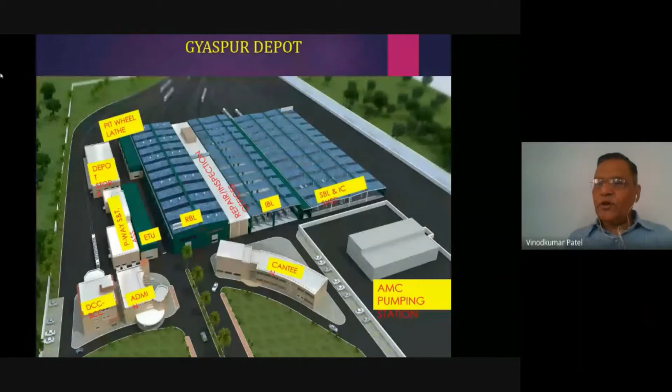Nayan, I will continue. I think this is part of formalities, right? So I want to say something about, yeah. Okay Patanjali, okay also sir. Actually, total number of registration is more than 230. Okay, lovely, continue just sir. No issue because joining is continuing for a long time. Yes, yes, they will keep on joining. Yes, that's good.

So there are many memories connected with Patanjali, especially both as part of alumni as well as personal friend. And yesterday we had a lot of discussion. He has since long been inviting us to visit the locations of Metro Rail, various locations where the work is going on. But because of the pandemic, we could not have a visit there. But let us plan something and see whether we can have a possible visit there.

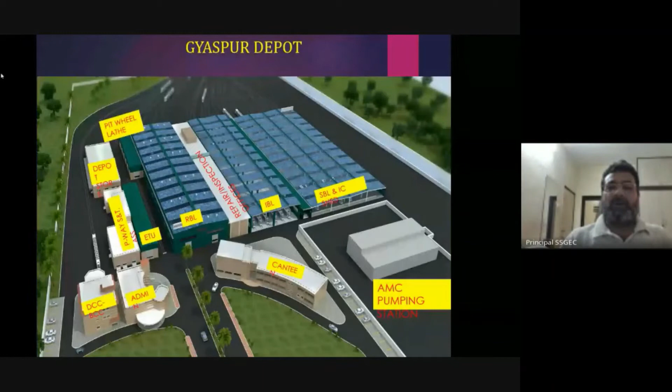And today's his address, I think this is the first one in our restart of this webinar series, right Nayan? Yes. So we welcome him warmly, and we also look forward that just like he has spared his time and sharing his work experience and expertise, this will be an example for other alumni also, that they also will come up and help the students to gain additional extra knowledge, which otherwise is not shared in the classes. But this is what really is very much useful. So not taking much time, I would like Nayan to do the needful and invite Mr. Patanjali for his experience sharing.

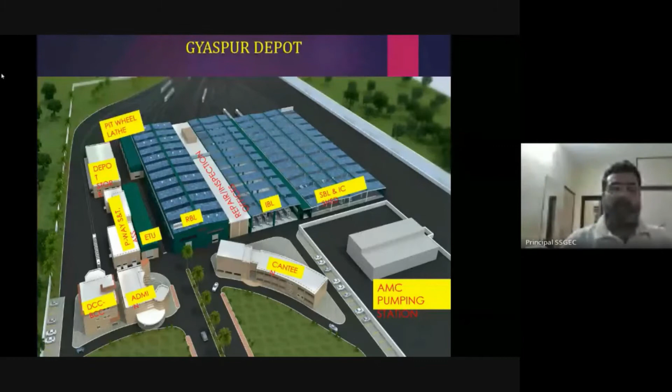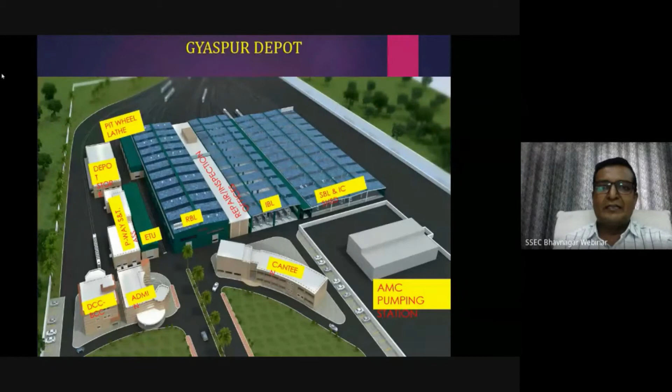Thank you, sir. Thank you very much, sir, for introducing Patanjali sir, and informing our students that sir is one of our alumni, and we are fortunate enough to have his vast experience sharing on this platform of webinar series phase 2. We are very happy that as VM Patel sir told, more than 230 participants registered within a couple of hours, because the flyer was just floated yesterday evening, and by the end of the day we got this much response from our college as well as from Government Engineering College, Bhavnagar, GEC Bhavnagar.

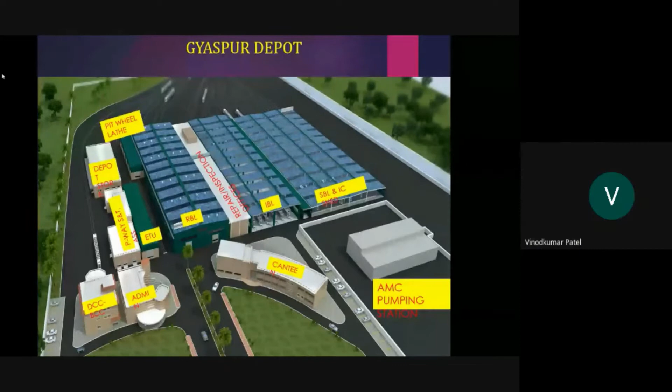Today's topic is also very relevant to the advanced construction of civil engineering. And our today's speaker is none other than our alumni, and my classmate also, my friend and my classmate also. So by the response of the students, we can understand how much it is important. And Mishra sir has a lot of practical experience. Basically, he started his career as an assistant engineer, and now he's a superintending engineer, looking after a very big project so far as Gujarat is concerned, the Metro Rail project. And we will take advantage today, not taking much time. Just I will hand over to Nayan Soni to give a brief introduction, and we will enjoy today's lecture. Soni sir.

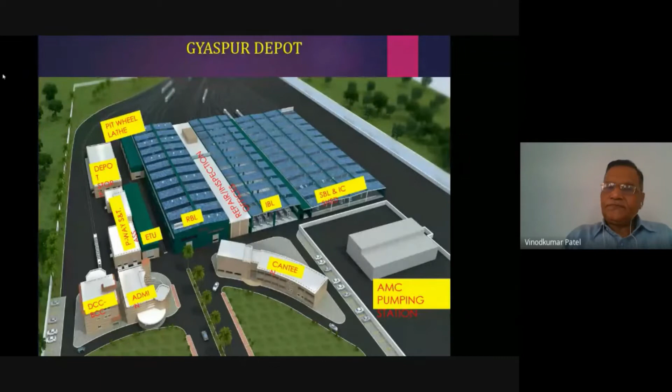Mr. Patanjali J. Mishra, who is one of our alumni from the civil engineering department. Sir has a vast experience of 30 years in the Road and Building Department in the Government of Gujarat, and various department postings in the National Highway Authority of India and the Metro Rail project. So far as the professional experience is concerned, sir is working with GMRCL, Gujarat Metro Rail Corporation Limited, since January 2014 till date. This is the most recent. And he has handled the construction technological work pertaining to metro rail construction during his tenure of 6 years on deputation from the Government of Gujarat. In the National Highway Authority of India, he has held the position of Manager Technical during his tenure of 3 years in NHAI, India, on deputation from April 2010 to December 2013.

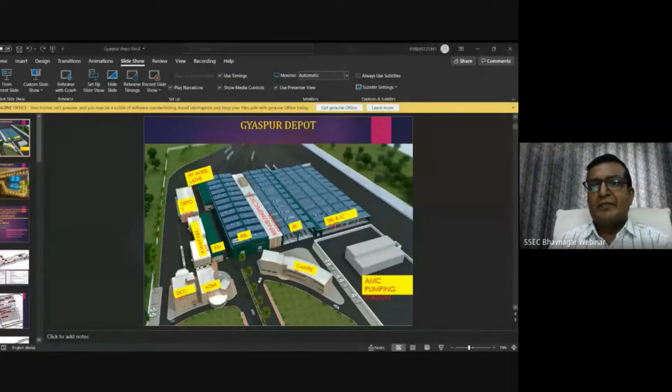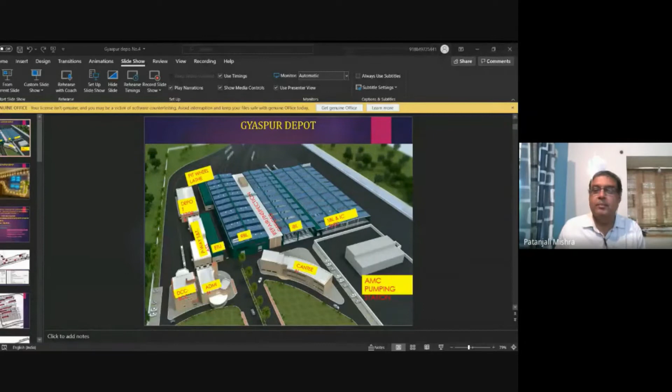In particular reference to my principal sir, Mr. Mangal Bhatt, Soni Sahib was always interactive with me since years, and my classmate, my batchmate, Dr. Professor Vinod Patel Sahib. It is this nostalgic feeling which has brought me for the first time to a presentation format. I'll try to do justice to that. This is because we were always on the site, never had the time to come out with whatever presentation I can bring forth to you. But it was such a great feeling. I think I'm among my own people, in particular reference to my great principal sir, Professor Dr. N.R. Dave.

And guys, to be very honest, I always used to wonder in my engineering years why the first year is common, because we'll study survey, and you won't believe me, my mechanical professors Dr. M.B. Jain, Dr. Dave, they were so great that somehow I used to think I should go to mechanical engineering. That first year is so great that if the professors are good, you start feeling I made a wrong choice in civil, I should have been in mechanical. When you study electronics or electrical, you start feeling I should be there.

But there's only one choice. Metro gave me such a thing where everybody is needed. To start with, if your construction is going on, halfway through, you'll have the mechanical people, electrical people, electronics, signaling and telecommunications coming and saying, I want this done in your civil engineering work, now you are leaving my ducts. So we call these the interface issues. It's not that I can do my civil engineering in isolation and go. No sir, I have to take care of other branches of engineering. So that's one big project where a simplistic knowledge of mechanical, electrical, and electronics engineering is much needed.

It's not that I may be a civil engineer and get away with that. No sir, you have to be there, you have to be sensitive to other people's needs. And it's so mind-boggling, the technology is changing day by day. Suddenly, even at the age of 50 plus, I feel outdated. Now I have to keep learning from my youngsters, young engineers like you who come to my metro rail. I get hold of them and say, teach me this. What is your system? What is your electrical boards? Where are they going? So you have one thing in life: you keep a vibrancy alive in your engineering.

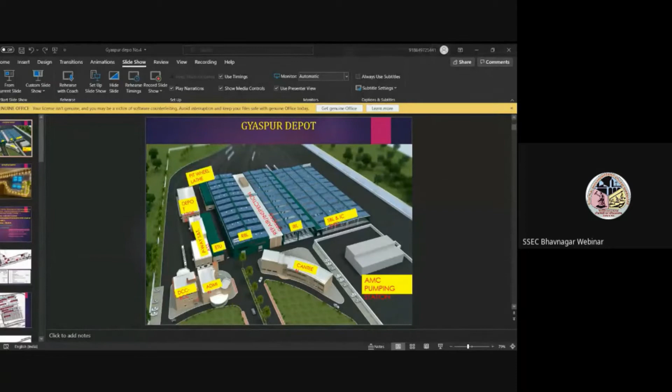Now, this is the aerial view of the metro rail depot, and here, if I may use a pointer, these are the sheds. Now, these are basically the pre-engineered buildings. What is the difference with a pre-engineered building? I can show in the later slides, but I'll mention it here: these are very state-of-the-art, fabricated, pre-engineered structures, which in this depot we brought from the Jindal Steel Works. So the purlins, the columns, the rafters, they come from their workshop and are just erected on site.

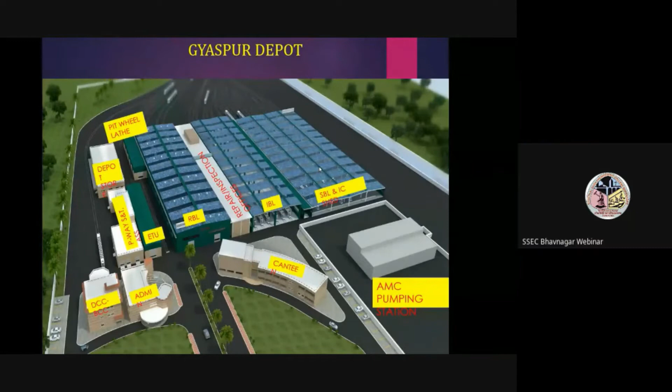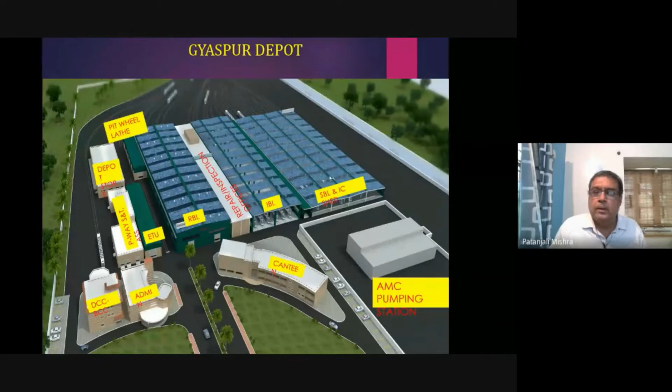So this is basically an SBL, means a stabling line. Stabling line is nothing but like a stable for horses, and for us the horses are my metro cars, metro rail wagons — we don't call them wagons, we call them cars. So these are the stabling lines, these are the internal cleaning bay, you have the inspection bay lines and repair bay lines. The logic is that your day-to-day maintenance happens and the train is just kept overnight, because early morning you'll start the metro and finish off by 10 or 11 o'clock at night.

So they come back to this depot, which is here, the parking garage. If nothing is to be done on those coaches, it is kept in the stabling line. If there is internal cleaning needed, some trash is left behind a little bit, but otherwise the metros are very spick and span.

And we don't even have a human toilet inside the cars. If there is bigger repair needed, we keep them in the inspection bay lines. For a larger repair, say changing of the wheel rims and all that, we bring the coaches out here.

And now this is your takeoff point. Early morning, the trains will leave from here, go up the ramp, and join the elevated structure which you keep seeing in and around the Ahmedabad horizon. So this is basically where your train starts early morning, say 5:36, whatever the time will be.

And by God's grace, we will be commissioning this north-south corridor, which starts from APMC to Motera. We have almost 18 kilometers long stretch in the north-south direction, and the stations are kept approximately 1.1 kilometers apart.

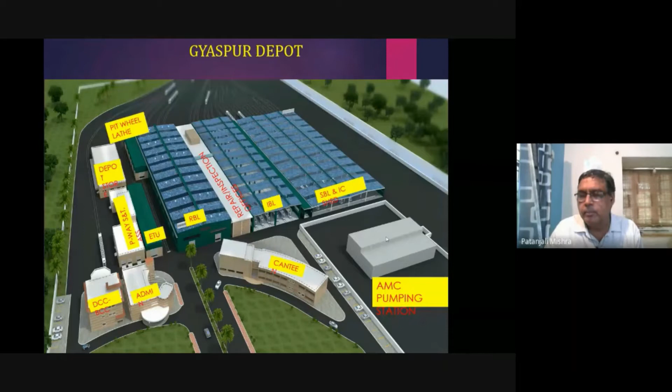And the further station will be Jivraj Park, then you have Shreyas Colony and so forth, then Ranip, then Motera. Motera will be the last station on this route. What we have designed is two routes basically in the metro, north-south and east-west. So for north-south, this is the depot.

And here we have a lovely system called the Depot Control Center. You won't believe it, our metros are driverless. But of course we'll be keeping two drivers, one in the front end and one in the back end. The Depot Control Center is the nerve center of this entire metro operation. The machines, or the cars, are so great you can use them driverless. That's a technological marvel, and you can control everything from this place.

However, we have got another big depot for the east-west line, called the Apparel Park Depot. And if by chance you have an emergency out there, that depot has the master control center which can run both east-west and north-south. And if those systems don't work well on that day, we've got the BCC, that's the backup control center.

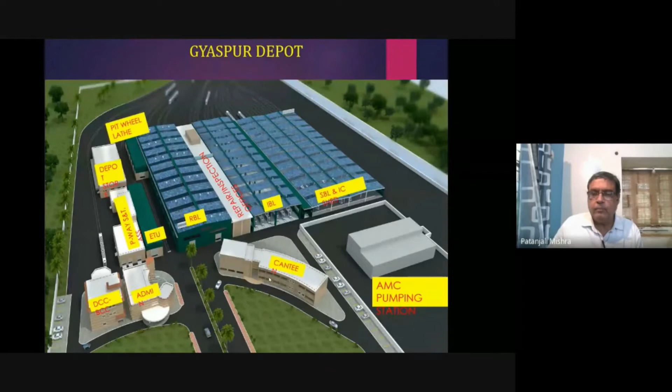Now, this is the lovely overnight view, you can say the bird's eye view. This was the old one, right? And this is your inspection bay. This is your internal cleaning bay. These are the repair sections, these are the workshops, this is the depot center, and you can see the lines fanning out. So we can mention the number of lines out here is around 20.

We've got future provisions also. This is, I think, called the emergency train unit. And now this line which you can see is a test track.

The moment we receive them, the company which is supplying us metro cars is the Hyundai Rotem company from South Korea. And Hyundai, yes, of course we call it Hyundai, but they call it Hyundai, the H is silent. So Hyundai Rotem is the company which is supplying us metro cars.

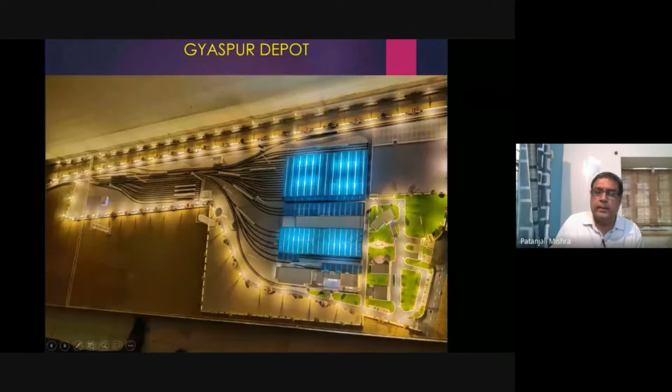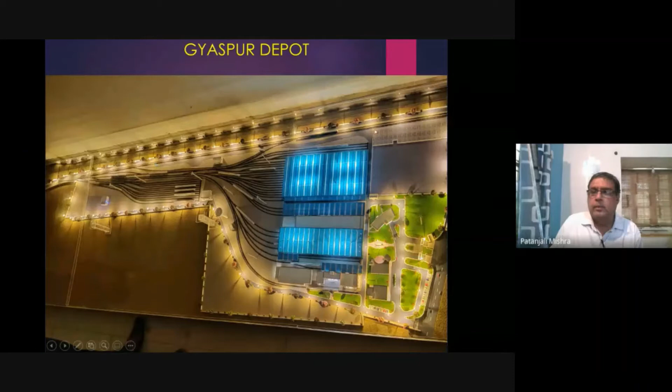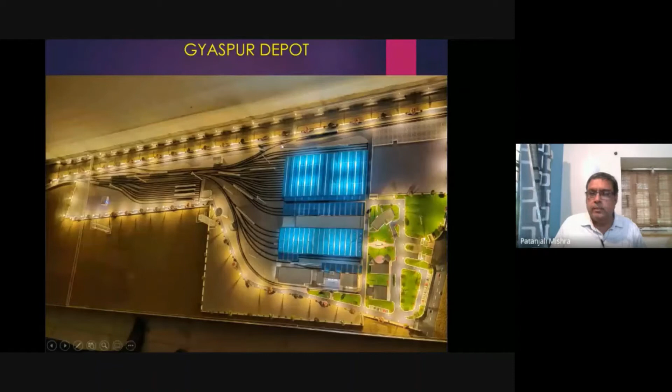This is the test track. Before putting your metro trains or cars into operation and maintenance, you have to test them on a track. So every depot has a test track where you can run the trains which you receive from this train company, and this is called the test track. Sorry, it's 965 meters long. Now you can imagine how much planning has gone into this.

Now this was the project. It was done by Gannon Dunkerley and PS Patel joint venture. The consultants, supervision consultants, we call them general engineering consultants, were basically Systra, RITES, AECOM, OC.

The contract value was 133 crores, but due to delay, cost increase, and the non-supply during pandemic times, workers were not there, so this increased. However, we completed it last year, 30 September 2020. Now these are the maintenance basic lines, stabling yards.

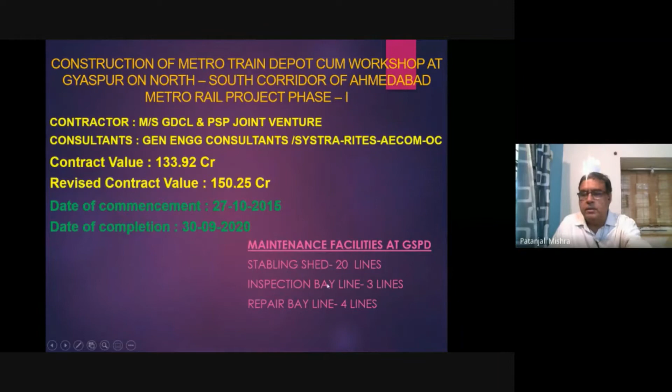We got 20 lines, inspection bay lines, and we have 3 lines. Now, if I enlarge this, you can see this is the basic structure, and this is where the tracks come out of APMC. You will have that Vishala Junction crossing.

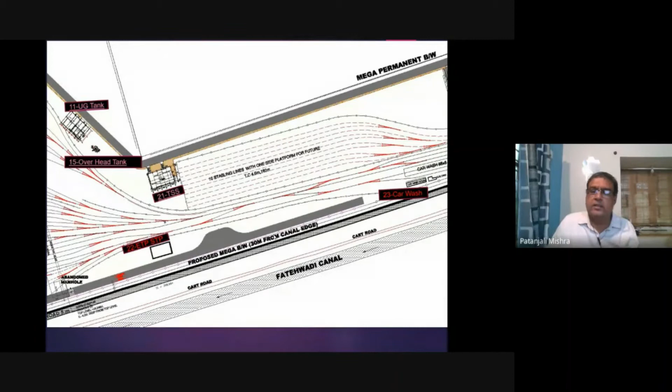Now imagine the site selection from the civil engineering point of view. We were just near the Fatehwadi Canal, which takes offtakes from the Vasna Barrage. This entire barren land was subject to illegal mining, people were mining sand, so we had a deal of filling up. We had to construct the boundary wall on the edge of the canal berm, which was a big task, and the Fatehwadi Canal flows right through it.

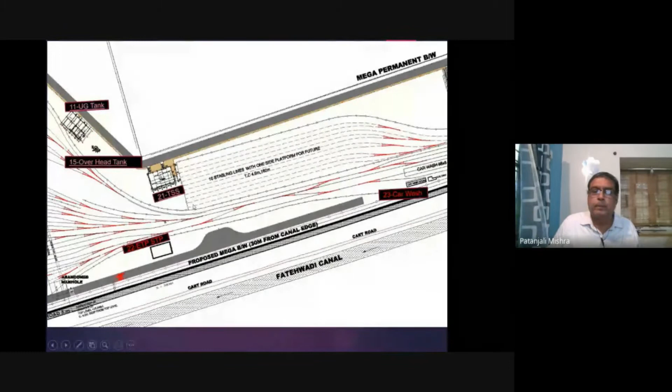Now we have got this cart track converted into a bituminous road for access into the Gyaspur depot. And now this is the difference - I was explaining the big sheds. They were constructed with a pre-engineered building.

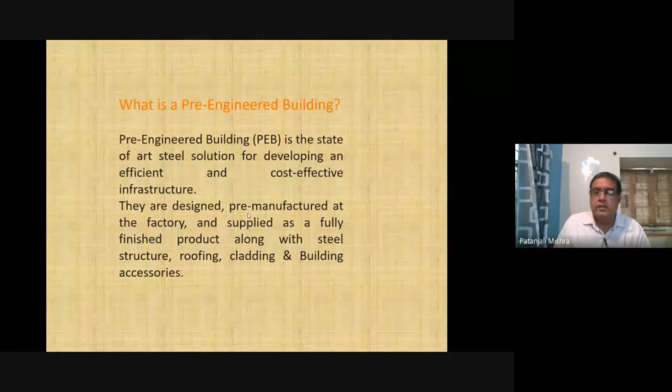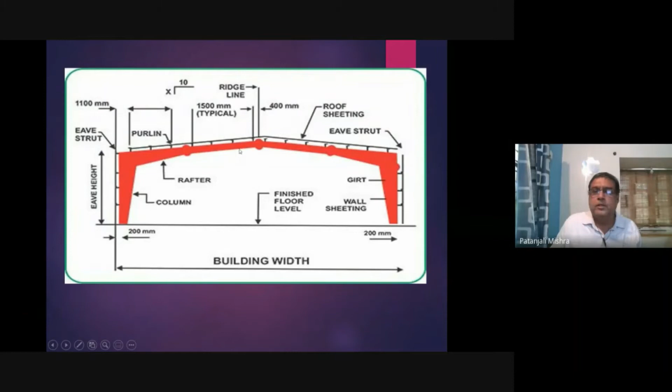Why? What is it? It's the state-of-the-art solution for developing effective structures. They're designed, pre-manufactured, and came from the Delhi workshop of Jindal Steelworks, which was our subcontractor. This is basically a structure from the structural engineering point of view - you have a pre-engineered building, the ridge line, the roof sheeting, the eave strut for drainage, girt.

Now, these were the initial pictures of the Gyaspur depot. These were the stabling shed, 20 lines accommodated in this great industrial shed. This is the side view of it. You can see how it came about, and we had not done the roofing then.

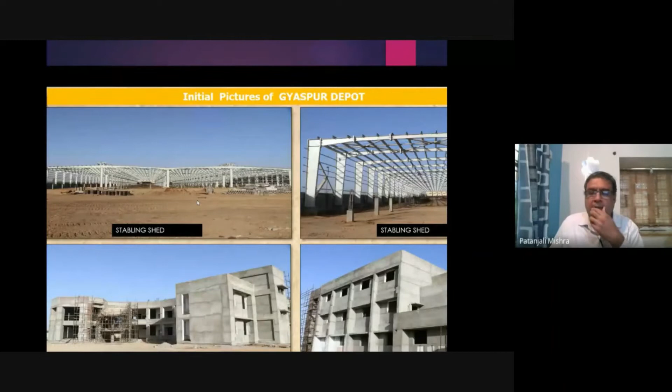And these are the initial pictures from when I joined Gyaspur depot for a year or so. These were the RCC buildings, typical administrative structures. Now, this is the finished product.

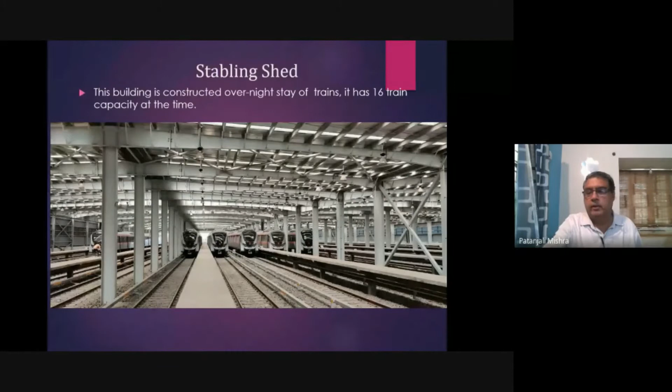Now this is the view which you get, a very rare view - you see my trains are lined up there. And this is the internal cleaning bay. You can go down the pit, you can clean the axles, you can wash even from the top, the AC ducts, everything.

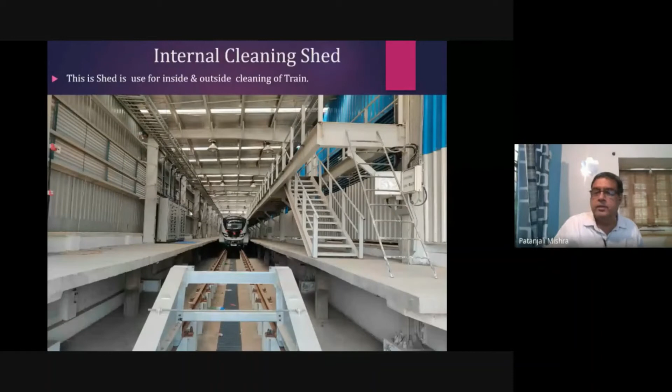Now, metro, you can imagine, it runs in the morning, say 5:30, 6 o'clock onwards to late night, say 8:30, 9 o'clock, or even maximum 10 o'clock. Then the real work starts in the depot at night time. It's always the night time, so you have a time and security. You'll have engineers coming up for the maintenance work in the night, because we have to use the night shifts only. Early morning you're running the trains, so it's only in the night where you can look after these cars, metro cars, or the metro wagons.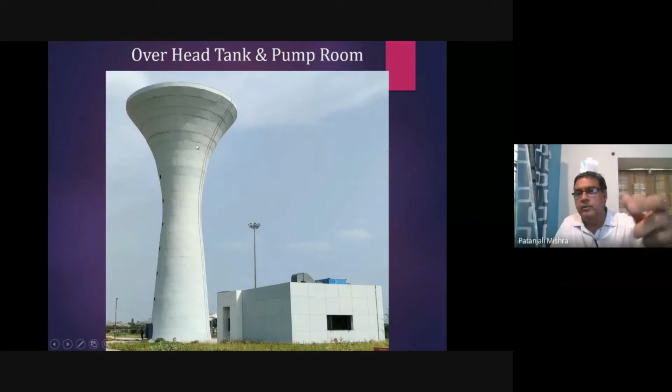This was like a space-type water tank, specially designed by an architect from Bangalore. We had a very tough time trying to construct this. You can see we didn't use the slip form, so we had to keep going manually.

The best part of a depot is once you have the boundary wall area and environmental clearance, no great trees were cut here. This was one of the best metro sites even in the country. We had no environmental issues, no trees were there, it was barren, just waiting for us to come and construct a metro. It was a very wise decision from the Government of Gujarat to select this parcel, right in front of the Vishala junction.

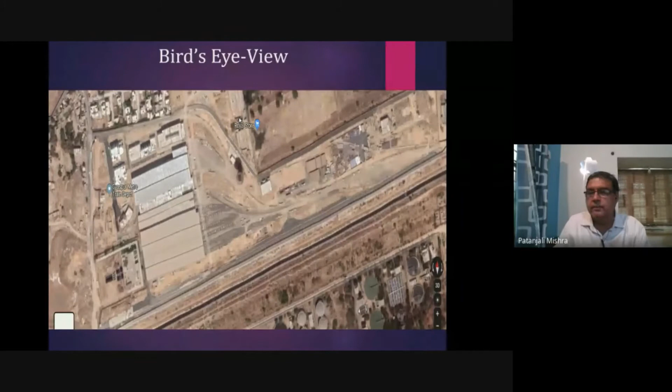How do you know it's working?

Yes, sir. Is it over, sir?

I can, if time permits, show you the real Apparel depot which is functioning now. We have a 6 kilometer line going on in the east-west corridor. It's not Gyaspur depot, it's the Apparel Park depot, where I think our mechanical engineers will love it.

Yes, sir. Yes, sir. Please carry on, sir. Hold on.

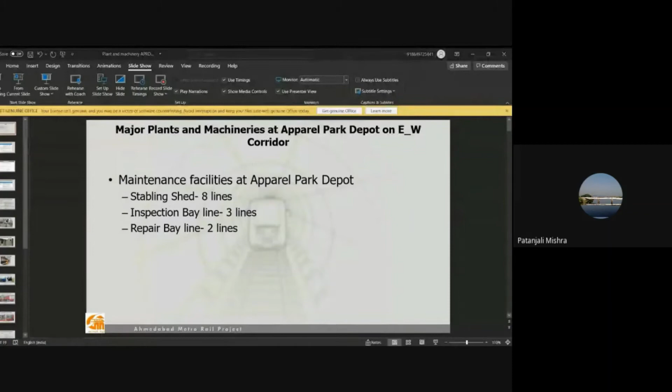Now this is another depot which is fully functional. It caters to our trains running between Vastral Gam and Apparel Park depot. So this is the Apparel Park depot, which has a lesser number of lines, say 8 lines in the stabling yard.

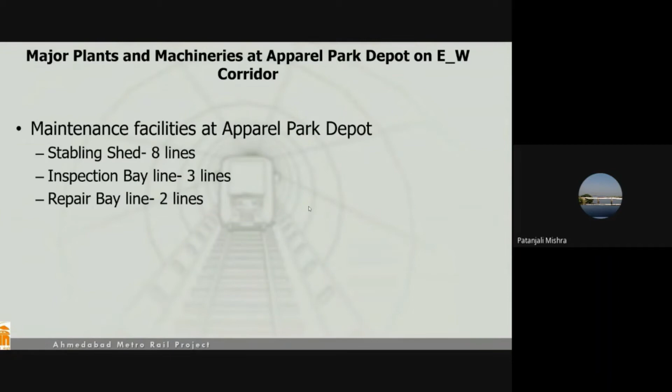There the space was limited. It's typical of old Ahmedabad, the Khokra area, and repair bay lines are fewer. But it's the master controlled depot, like the Hassan facility of ISRO, which controls everything. So this is my MCF.

Now you can see the major plants and machineries at the Apparel Park depot. Daily, what we do is check on train conditions, function at every daily service completion, and interval cleaning. This is done in the stabling lines.

Now you have a category of service check, which happens when the trains have run for 5,000 kilometers. I think they cover this in approximately 15 days. So you have to take them to the inspection bay for testing their subsystems, underframe replacement, and topping up of oils and lubricants.

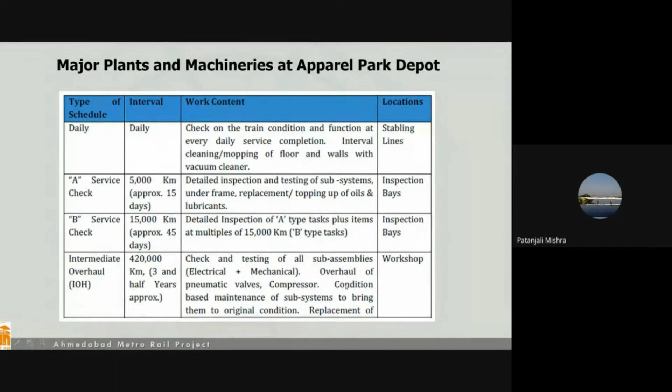How do you tackle emergencies in metro systems? At the stations we have an emergency stop plunger to stop trains approaching the station. Then you have a trip system, which was actually needed—last year when we were running the train, we had a problem from kite flying. I think some kite had gotten entangled in our system.

It gives me a matter of pride to say we've got the third rail system, not the overhead—overhead looks clumsy. Of course, we're prone to more maintenance because the third rail runs parallel to the two rails on which the bogie of the car goes about. And we run our metros with 750 volts power.

You have a fire alarm system, a fire extinguisher, a typical firefighting mechanism out there. Everything is there, so I won't go into detail, but we try to foresee issues.

The biggest thing I learned in metro was safety. Even while constructing, our workers are dressed with a helmet—we call it PPE, personal protective equipment. We have a safety helmet, we have safety shoes, and it's a matter of pride.

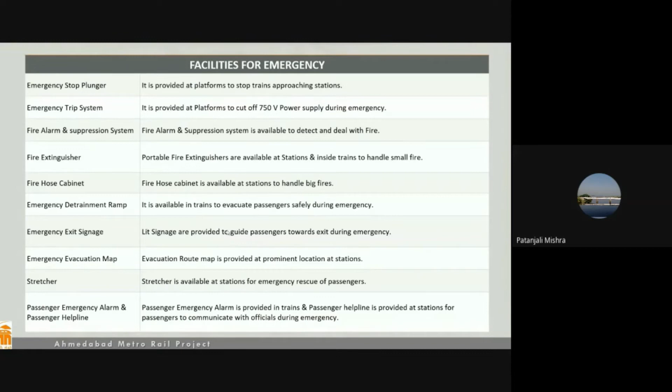Even the railway people who come on deputation from Indian Railways say, 'We haven't seen this much safety even in the railways, sir.' During construction time, even when higher-ups visit elsewhere, they come without any PPE. In metro, it's mandatory for any top-ranking official or a small-ranking worker to wear his PPE kit. We take pride in being an engineer, putting on our safety helmet, safety shoes, and that retro-reflective jacket—that's like a doctor's apron for us.

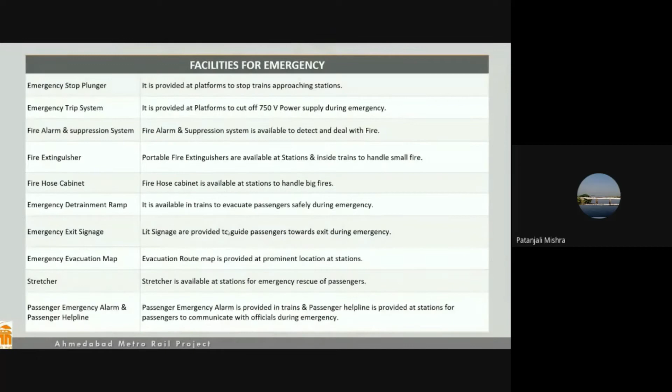Whenever we venture out to any site of work, you will see all metro officials, whether engineers, supervisors, or construction workers, everybody doing three mandatory things. Safety, we take utmost care of.

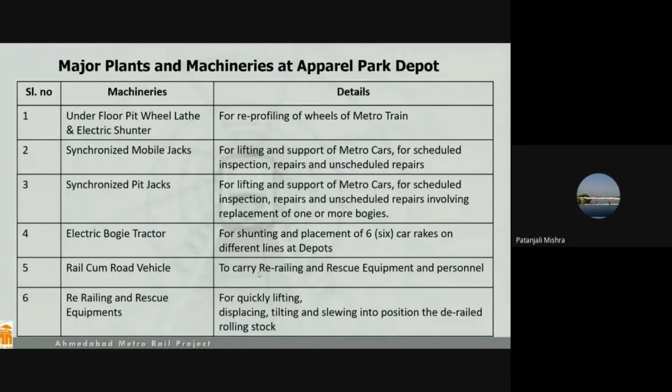Now these are photographs of a typical metro rail depot, from the Metro Apparel Park depot, which is working and functioning. You have an under-floor pit wheel lathe here.

Now imagine all the foundations have to be constructed by the civil engineer. So it's here that we start receiving feedback from our mechanical counterparts, from our electronics guys.

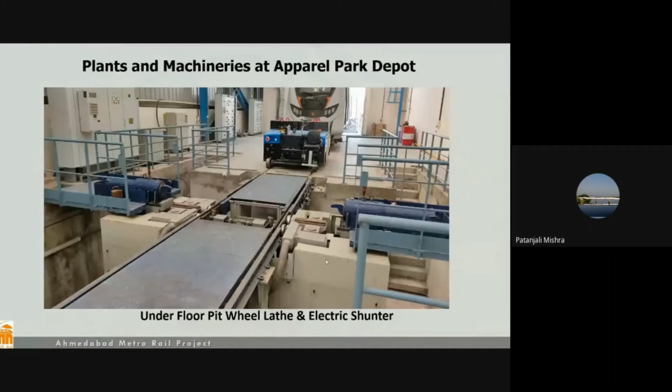Now these are the synchronized mobile jacks to lift your metro cars. And this is the electrical bogie tractor, which can actually pull a series of trains also - it's so powerful.

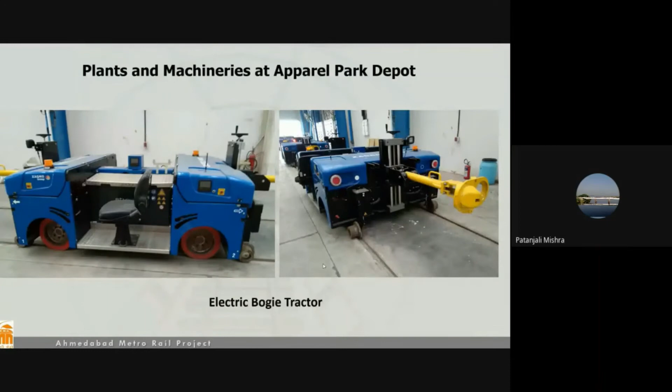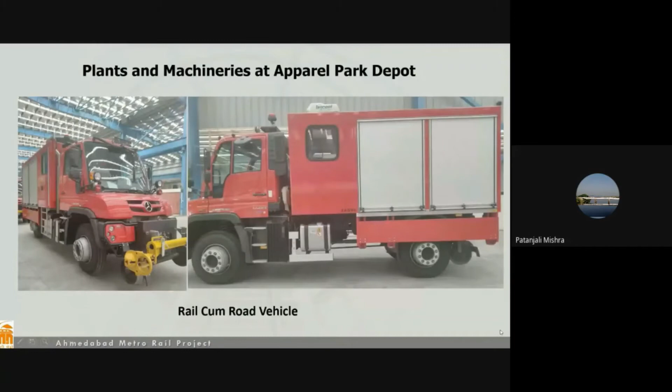Now this is my Mercedes-Benz rail-cum-road vehicle. It can go on road, it has metal rail wheels also, and it can put itself on the track and go about.

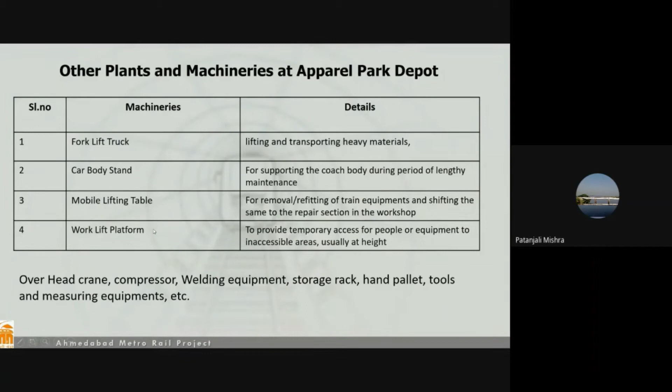This is all the equipment filled in this truck - basic forklift truck, car body stand, mobile lifting table, work lift platform. Now these are the forklifts and the car body stands, and you have a mobile lifting table.

Why is a mobile lifting table required? Basically we have a rotating turntable also. If you want to change the direction of your cars from length into breadth, you put it there and rotate it out - like in earlier times with steam engines, where we used to change the direction because the cabin faced only one direction.

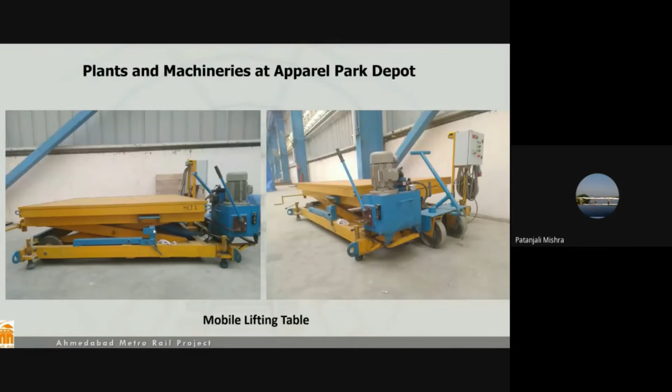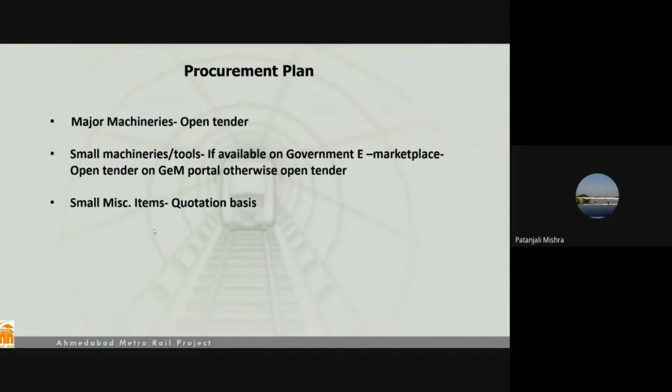Now this is a working lift platform. This is basically a mechanical engineer's job - how you go about the procurement plan for major machineries: open tenders, small items, estimates, and technical specification approvals.

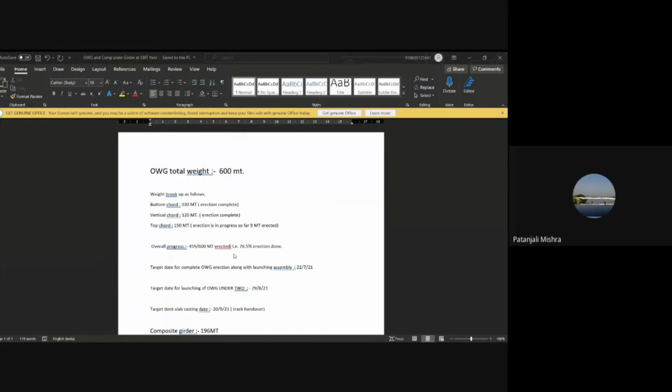We have almost got it erected by 77%, and God willing, by His grace, I think by next mid-August we'll be launching it over the Sabarmati railway yard. This is basically a metro rail crossing between the RTO area and the AEC station area.

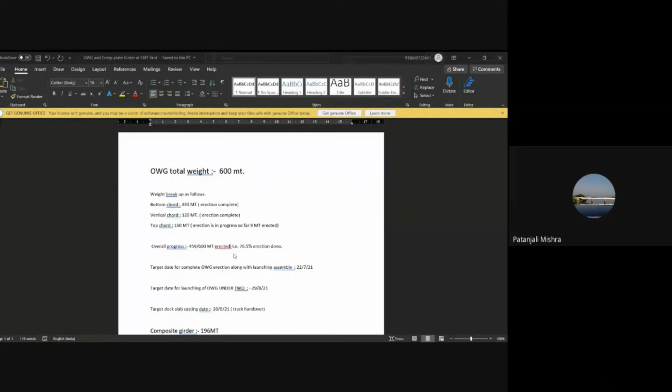Compulsorily the railway had asked for a steel structure because on the railway line a 73-meter precast bridge could not be allowed by the railways. So they have gone for a 73-meter single piece open web girder. I'll show the photographs. Now we have another small steel structure alongside it, which is just 36 meters. It's called the composite plate girder.

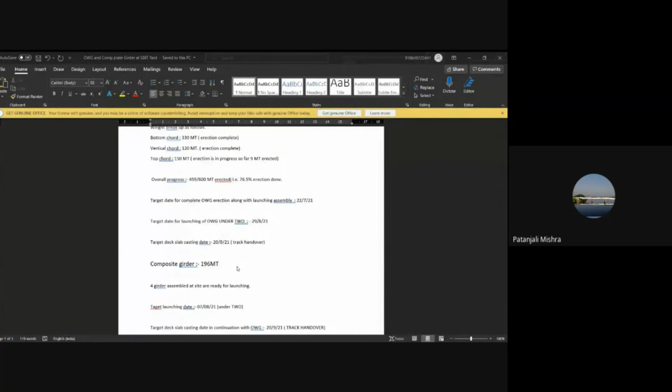Even the photographs, I think I may not have them now, but these girders, this composite girder and the open web girder, will be allowing the metro rail to cross from one end of Chimanbai pol to the other end, over almost a series of 7 or 8 broad gauge railway lines. So I can show the photographs.

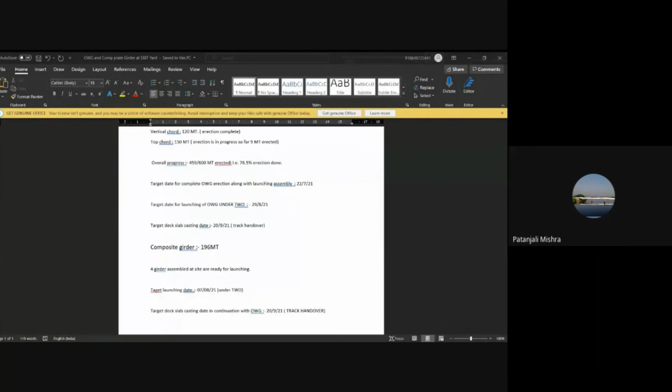Now this is the open web girder which is under construction. It's going to be a 73 meter span. This existing bridge, you can say, is the Chimanbai Pull, which connects the RTO Ahmedabad to the Sabarmati area.

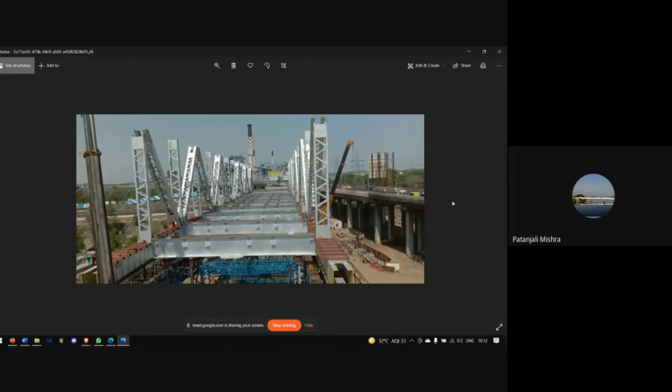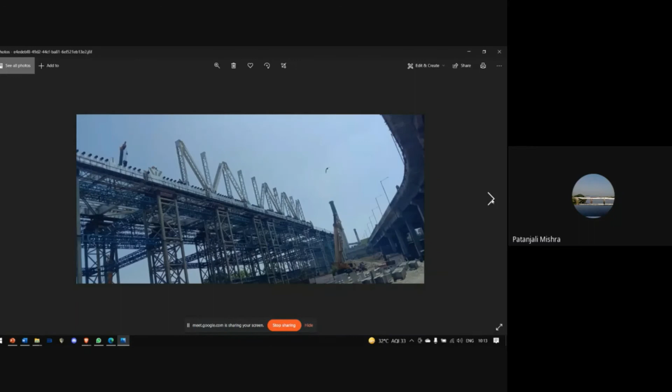Now these are different views. This will be the bottom chord bracings we have done, and we've erected the side ones. You can see a panoramic view coming up. This is almost complete, and we'll be at the starting point of this.

We'll be putting a nosing section, which is almost 14 meters long. As it's a simple steel point, we'll be pushing it, holding winches from here, and the entire 73 meters is going to slide. Within a span of 3 days, we'll be trying to cover the distance, taking about 5-6 hours.

I think in a single day we'll be covering over 5 or 6 railway tracks, keeping it on the other pier. So that will be the, it's a steel structure which is going on.

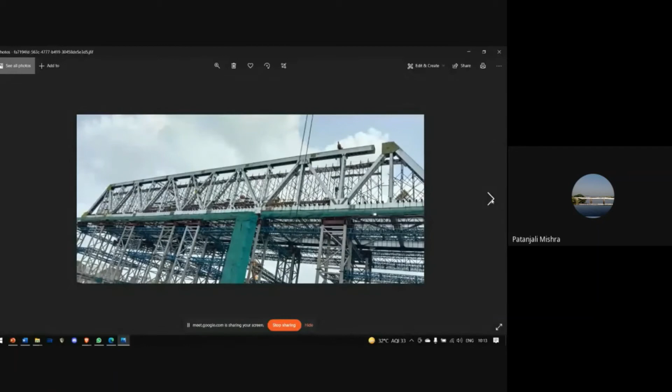So from here to the next pier, these two piers are there. This is pier 1, this is pier 2, and over this the steel structure will be sliding and going away.

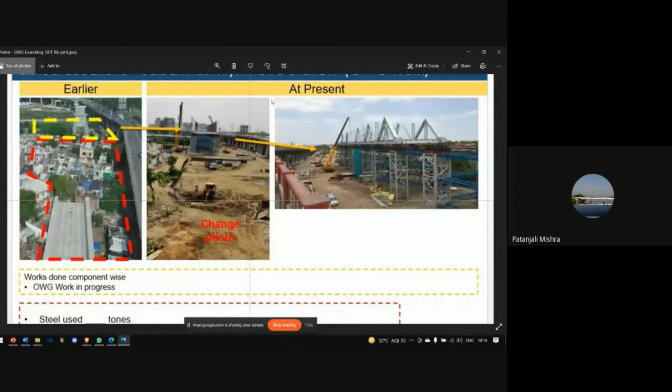Now I'd still like to show this construction schedule. You remember, civil engineering or mechanical students have to learn about the critical path method. Yes guys, it's there. So please pay attention to your construction management or quantitative techniques.

These tools will all be useful in later life. Don't think it's a simple subject, try to master it. Try to find out what is float, total float, early finish, late finish. All this is going to be there for your real world also.

Okay, suppose we have broken up the activities into different parts. This is my open web girder area, this is my composite. We have got the time frame limit.

We keep checking with our site engineers or the fabricators. There is a very good company called Mukhtar Engineering Works, and it's an RDSO approved fabricator. RDSO means Research Designs and Standards Organisation of Indian Railways, based at Lucknow, and that gives all the clearance to the drawing. An open web girder is not a simple issue.

We'll be taking railways permission. There will be an entire team from railways that comes and visits, called the Commissioner of Railway Safety. So this entire bridge structure is being checked by us.

It's being checked by our consultant engineers, and will be checked by Western Railway. God willing, I think it will be in position by mid of next month. And again, this is a smaller structure which is called the composite girder.

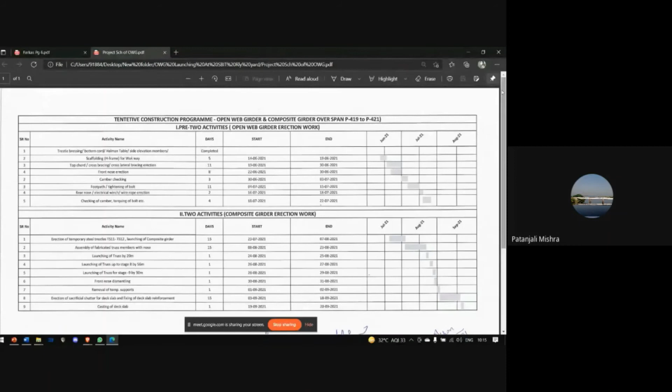Yes sir, now yes, I may permit sir. Yes, very good exposure given to our students, and students also have to see that sometimes we believe a subject is not useful to us, but everything is useful in the field. Mishra sir has also given our final year students a better understanding of CPM. So it is useful and it is used in the field. Thank you very much, Mishra Sahib, and we will take your kind advantage in future also.